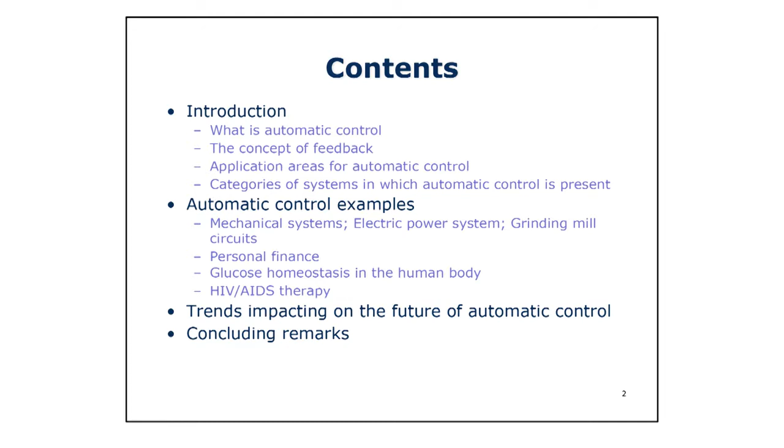So the talk is structured as follows. I'm going to start with an introduction, just to give some indication of what automatic control is about. Then talk about the concept of feedback, and then talk about application areas of automatic control using IFAC as a structure. And then I'll categorize the examples that I'm going to present in a categorization that at least makes sense to me and hopefully to you as well. Then the examples that I'm going to present are some mechanical systems, because they're very visual and people can relate to them quite easily. I'll talk briefly about electric power systems.

And then I'll give an industrial control example as well, which is grinding mill circuits. And then to show that you don't have to have a physical system to apply these concepts, I'm going to talk about personal finance as a non-physical system, but still engineered. And then I'll close off with two biomedical examples: glucose homeostasis in the human body and HIV/AIDS therapy. Then I'll conclude with some trends impacting on the automatic control field and on a lot of other fields as well, and then give some concluding remarks towards the end.

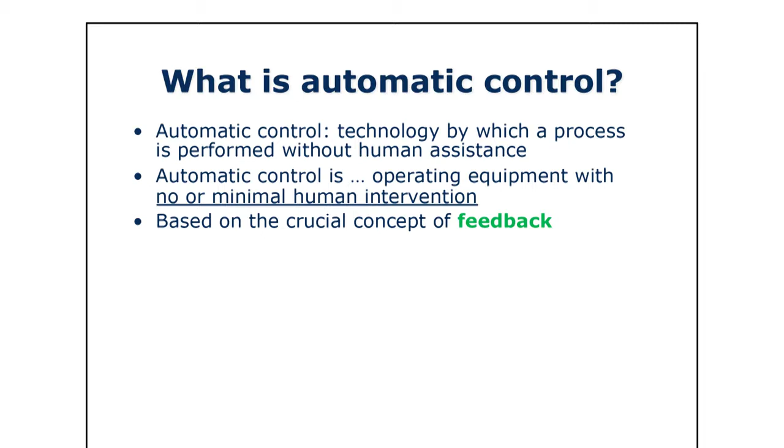Right, so what is the definition of automatic control? This is from Professor Wikipedia. Automatic control is the technology by which a process is performed without human assistance. And then goes on to say that automatic control is operating equipment with no or minimal human intervention. And automatic control is very heavily based on the concept of feedback. So let's look at the concept of feedback.

When people think about feedback, you might think in terms of a survey that's done. Were you satisfied with some service? Were you agnostic to the service, or were you dissatisfied? In automatic control, it is not good enough just to say that you were satisfied or not satisfied. You actually have to do something with the information.

So in automatic control systems, feedback is information obtained from a system used to change its behavior. And that's a crucial concept in feedback. For those of you who've done some automatic control courses at university, feedback control is also known as closed loop control. One has to close the loop from giving your opinion and actually doing something about it.

And the main purpose of feedback is to counteract uncertainty. Uncertainty in the model of the system that you're trying to control, uncertainty in terms of additional signals that might impact on the system. No feedback is required if you're living in a perfect world, but our world is not perfect, so we do need feedback.

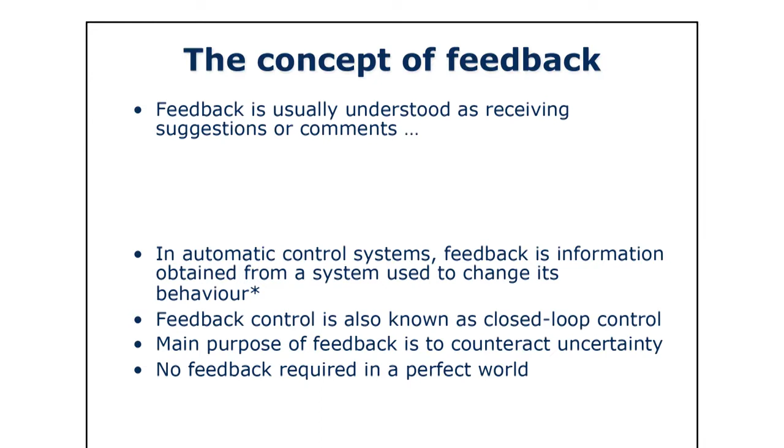Feedback control systems are described in terms of block diagrams typically. So the block diagram consists of a box like this with inputs and outputs, and these boxes could be linked together. So the output of one box could be an input to another box. And these boxes can take actions, and measurements can also be taken from the box.

And these actions and the measurements are called outputs, and they're indicated with an arrow leaving the box. And then a box can also receive information from outside of the system or from other boxes, and those are called inputs.

So to look at the structure of a typical feedback control block diagram, it consists of the following components. You first have a process or a plant that you want to control, and this is not like a pot plant that you put in the kitchen on the windowsill. It will hopefully become clear as I go on what we mean by a plant or a process. The plant has some outputs that you want to control typically, and it might have some other outputs as well that you just want to observe.

There's some sensors which measure what these outputs are, and you feed it back. This is like closing the loop. You feed back these measured plant outputs. You compare that with what you want the outputs to be, so the desired outputs, and the controller will then figure out what controller commands to give.

Sorry, let me just run down there.

The controller will figure out what commands to give to the actuators, and the actuators have to implement the controller commands, so that the plant inputs will drive the process outputs towards the desired output. So the main idea is to make that and this the same. Yeah.

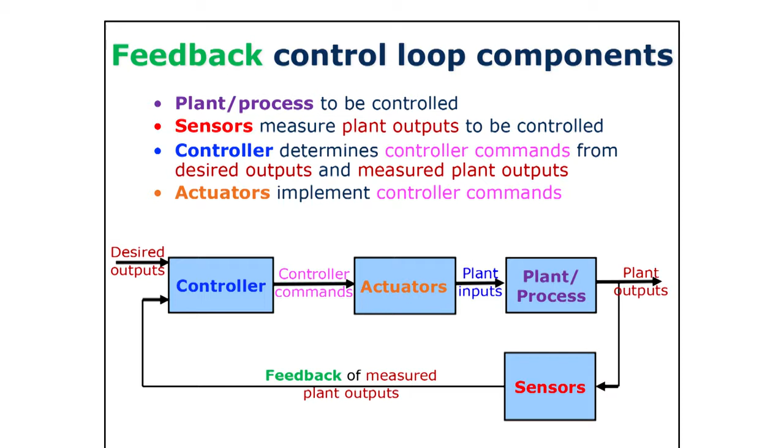Now, to take a human body analogy of this, you can think of the plant as the body. So there's the process. You can think of the sensors as the sensors that humans have, like the eyes and the ears, and you feed back this output. You compare it to the desired output. This is processed in the brain. So the automatic controller is the brain of the system.

And the actuators are like the muscle that has to drive whatever the body wants to do towards the actual output, compare that to a desired output.

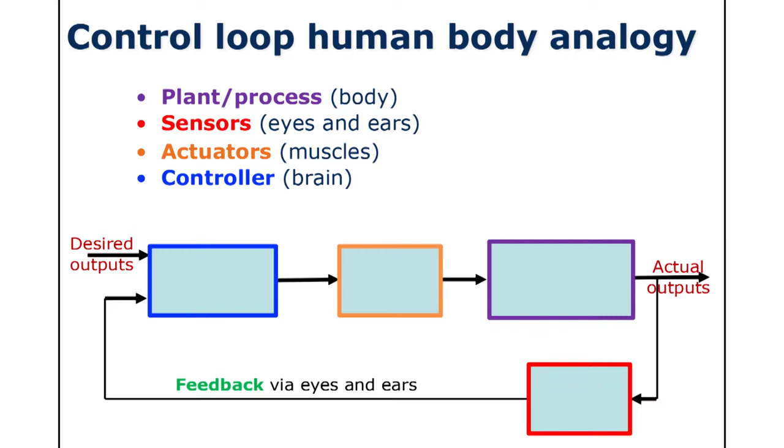This microphone is on the wrong side for me to talk that way.

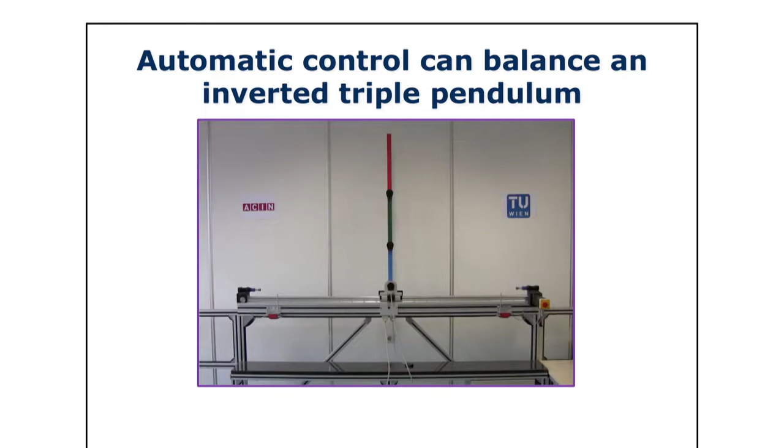So we were talking just before the presentation about the distinction between automation and control. Control is more about the brain of the system, the automatic control, and automation would be what you need to make the control system actually work, like the actuators, the sensors, also the platforms on which you implement, the way the platforms are connected to each other and to the sensors and so on. So I'm going to talk about automatic control systems and essentially this feedback loop.

Now to give you a sense of the breadth of the field, I'm going to take the IFAC technical board and break it down into its different coordinating committees and also show you what the technical committees do under those. So IFAC's technical board has got 9 coordinating committees, 4 of them are theory based, and then there are 5 application orientated coordinating committees with a number of technical committees under them.

So the first one is mechatronics, robotics and components. And the technical committees under this coordinating committee are mechatronic systems, robotics and human machine systems. Then there's a coordinating committee, manufacturing and logistics systems, where we have a number of technical committees: manufacturing plant control, manufacturing modeling, management and control, enterprise integration and networking, and then large-scale complex systems.

Then there's one process and power system. So this is where my research area is based in this coordinating committee. We've got chemical process control, mining, mineral and metal processing, power and energy systems, fault detection, supervision, safety of technical processes. And then there's the coordinating committee on transportation and vehicle systems, which includes automotive control, marine systems, aerospace, transportation

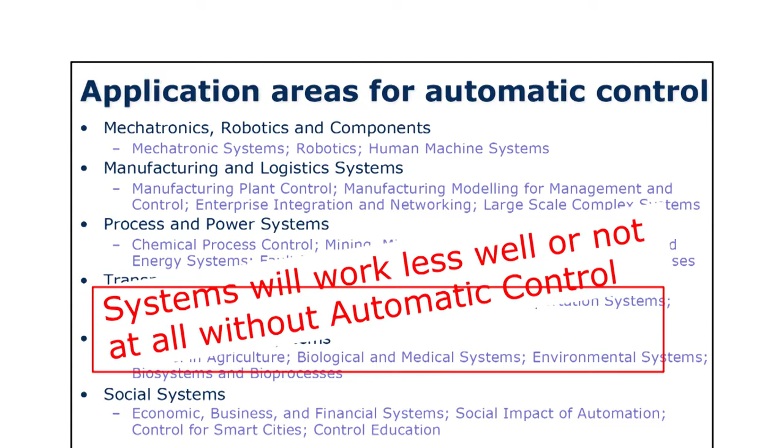systems, intelligent autonomous vehicles. And then there's one on bio and ecological systems, control in agriculture, biological and medical systems, environmental systems and biosystems and bioprocesses. And then the last one is social systems, where we look at economic, business and financial systems. Also the social impact of automation, control of smart cities and control education.

And so the purpose of this slide is to give you an indication of the breadth and also to say that these systems will work less well or not at all if not for automatic control. So that brings me then to the examples that I'd like to present. I'm first going to talk about physical engineered systems and in particular mechanical systems with an inverted pendulum, a quadcopter and an aircraft. Then I'll talk briefly about electric power systems and then grinding mill circuits.

And then I've got one example of non-physical engineered systems where I'm going to talk about personal finance. There are many others that one can also possibly talk about. And then non-engineered physical systems, glucose homeostasis and also HIV/AIDS therapy.

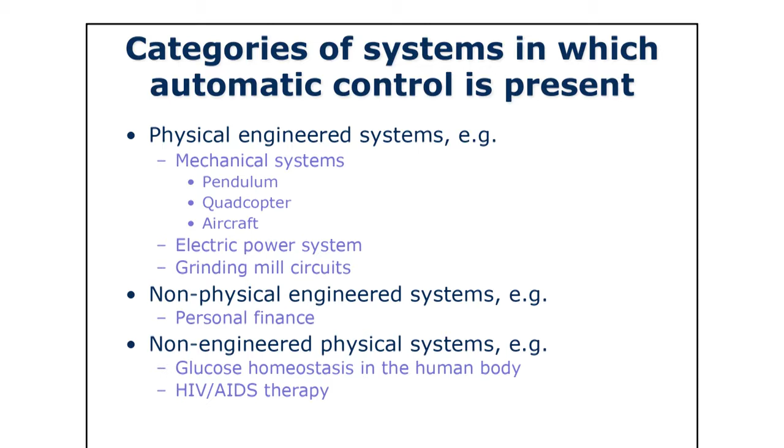So let's get to the mechanical systems. The first one I want to talk about is the fact that automatic control can balance an inverted triple pendulum. So let's have a look at a little video. So this was done in Professor Andreas Kugi's lab at the Technical University of Vienna a few years ago.

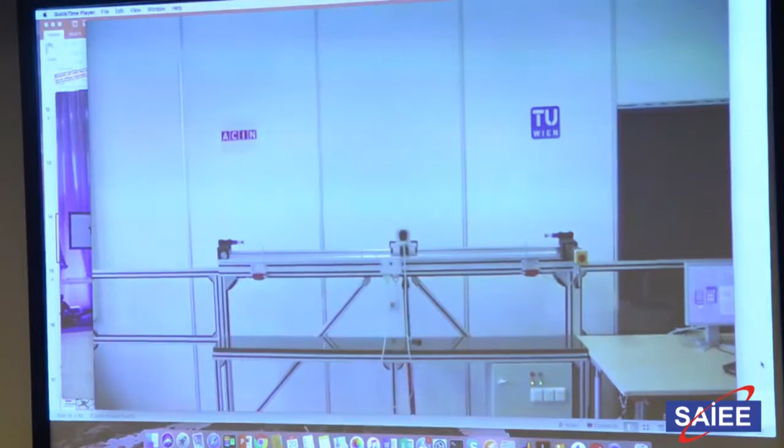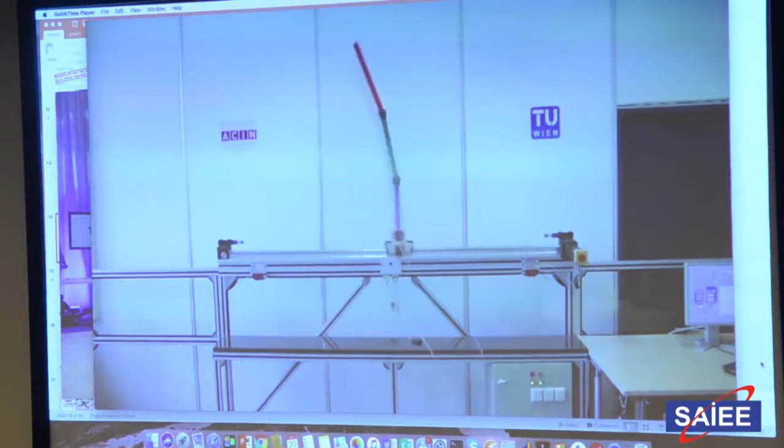So the way the system works is you've got a motor that's connected to a drive belt which moves this cart up and down. And then there are sensors which measure the position of the cart and then also the relative angles of each of these pendulum components. Right.

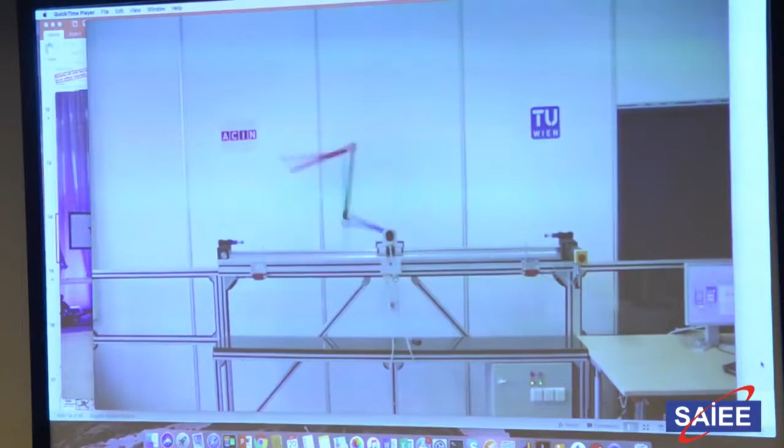Now in our final year we've got finally a project which is the equivalent of 4 undergraduate final year modules. So the plant in this case, so the system that you want to control, is the pendulum system. There are 4 outputs, the cart position and the 3 pendulum angles.

And these encoders are 2048 increments per rotation, so they're very accurate, and they've got a wireless connection to the hardware on which the control system is connected, so there's not much friction, as you could see. And the motor, the input is just a motor connected to the cart by a drive belt. And for control guys in the audience, this is the block diagram.

So there's the system. You've got the outputs, which are fed into an observer. The inputs are also fed into the observer. You estimate a trajectory, compare it to what you want it to be, and then do control based on that. And there's also a feed forward term.

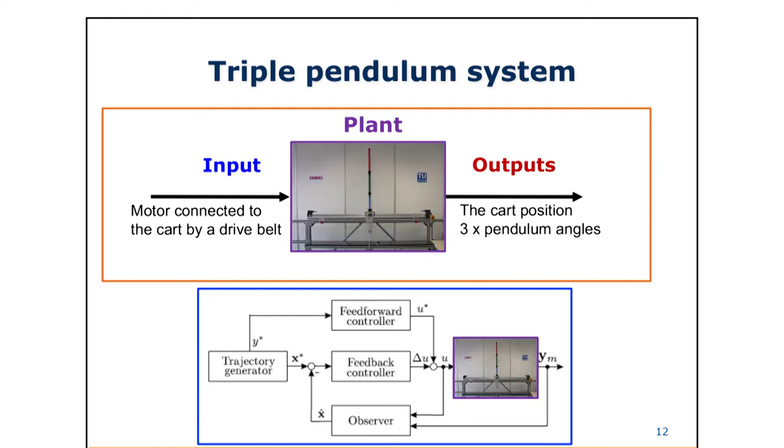So with feedback control, something has to happen first before you can feed it back. But with feed forward control, you can anticipate, if you have a very good model, what's going to happen, and then take some corrective action before the feedback actually gives you the information. So that's the one mechanical system.

The other one I briefly want to show you is this, that automatic control can make athletes out of quadcopters. So just have a look at this video.

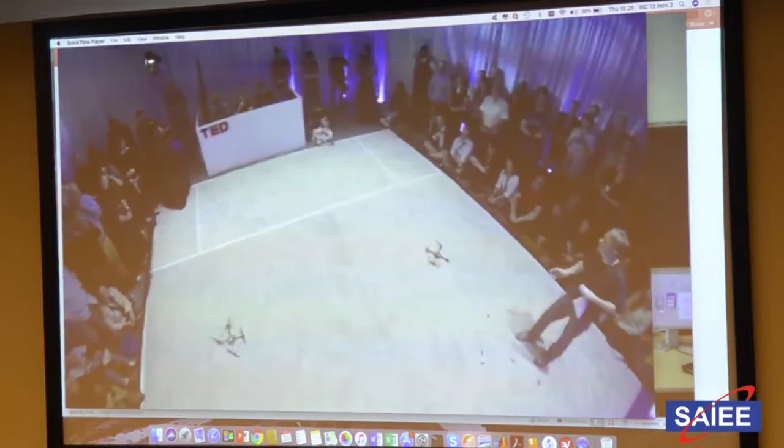And has a racket strapped onto its head with a sweet spot roughly the size of an apple, so not too large. The following calculations are made every 20 milliseconds or 50 times per second. We first figure out where the ball is going. We then next calculate how the quad should hit the ball so that it flies to where it was thrown from. Third, a trajectory is planned that carries the quad from its current state to the impact point with the ball. Fourth, we only execute 20 milliseconds worth of that strategy. 20 milliseconds later, the whole process is repeated until the quad strikes the ball.

Machines can not only perform dynamic maneuvers on their own, they can do it collectively. These three quads are cooperatively carrying a net. They perform an extremely dynamic and collective maneuver to launch the ball back to me. Notice that at full extension, these quads are vertical.

So this is what we have. The plant is the quadcopter. The inputs are the speed of these four motors. And then the outputs are the angular velocity of the vehicle, the position, and also the orientation in terms of

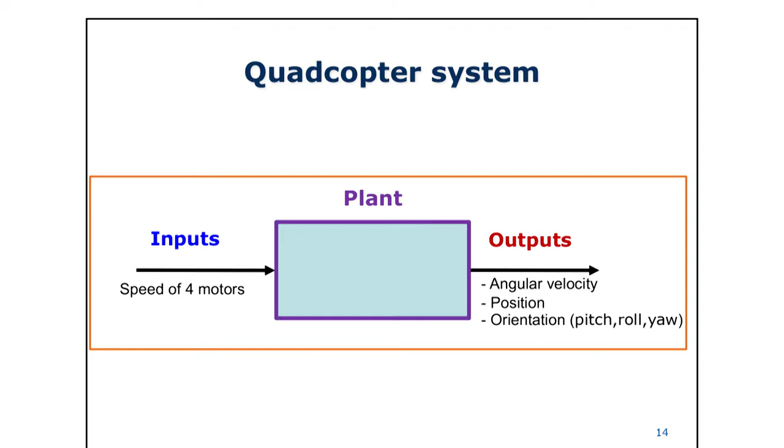pitch, roll, and yaw. There are 8 cameras in the roof of this arena, very high-speed cameras, which tell the quadcopter controller where the quad is and what its orientation is. Okay, so with that, I'd like to move then on to modern aviation.

And hopefully I can convince you that with automatic control we can have modern aircraft, and without we might have something like this. Okay. So I'd like to have a look at the evolution of aviation from 1903, when the Wright brothers flew their first Flyer 1 aircraft. This was the first powered flight and also the first aircraft capable of sustained controlled flight. It's not an airliner, so the heading there might be a bit wrong for this first example, but for the

others it's correct. The next big advance that came in airliner type aircraft was the Boeing 247, where the first autopilot was introduced. Then the next big advance came with the Convair 880 in 1959, where the first so-called handling qualities controller was introduced. And this was necessitated by the fact that this aircraft could fly a lot faster and also a lot higher than the aircraft that came before could fly.

And for a pilot, it's difficult to fly a plane when the dynamics change all the time. So the faster you fly and the higher you fly, the more the dynamics is different from what they're used to. So they introduced a handling qualities controller to make the response to the pilot commands feel the same over the entire flight envelope. So whether you're flying fast or slow or high or low, the response to the stick movements felt similar.

The next big advance in airliner control was in 1982 with the introduction of the Boeing 767, where the first flight management system was introduced. And with this system, you could just give it like GPS waypoints, and the aircraft would fly to those waypoints. This greatly reduced the workload and fatigue of the cockpit crew. So airliners then reduced the number of crew from 3 to 2. So like we have today still, you have a captain and a co-pilot, or a pilot and a co-pilot.

And then the next big advance, shortly after 1982, was the Airbus A320, which was the first fly-by-wire aircraft. And this also made it possible then to introduce safety systems so that the pilot couldn't do something that he shouldn't do unless he overrides all the control loops, of course.

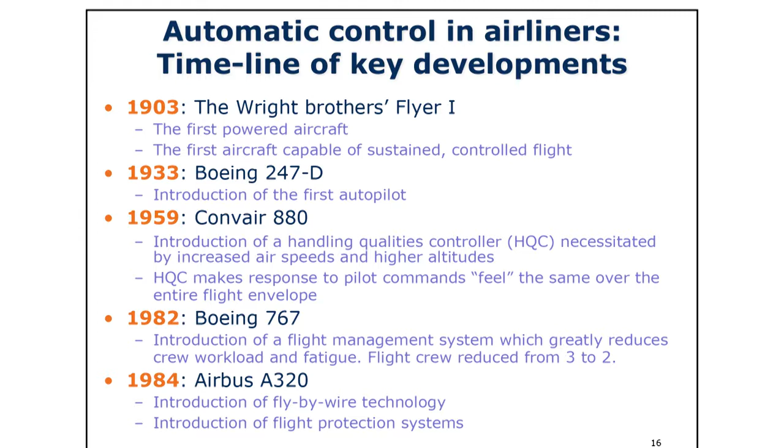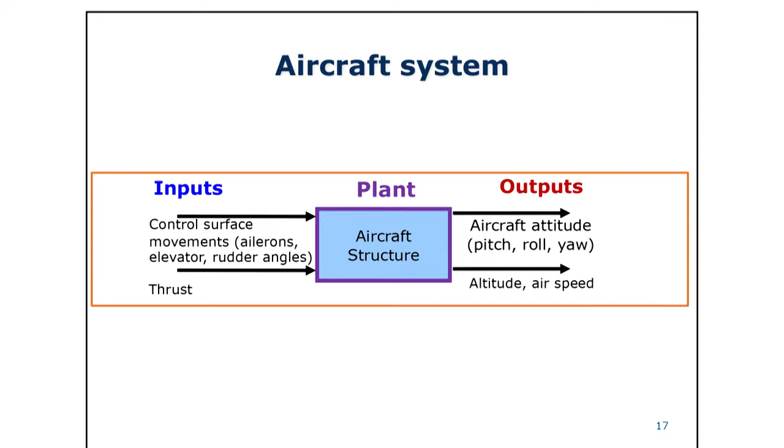So if you look at the Wright brothers Flyer 1 in terms of a feedback block diagram, there's the aircraft structure as the plant, the aircraft state is the output, and the pilot in this case did all the sensing. So you could see where you're going, and you could feel with your vestibular system what the orientation of the vehicle was. And then the pilot got those signals, went into his brain, and then he told his hand to move the stick or warp the wings depending on what he wanted to do.

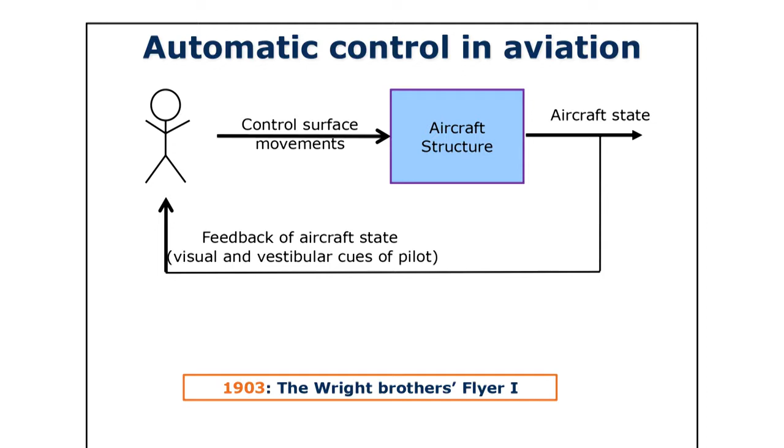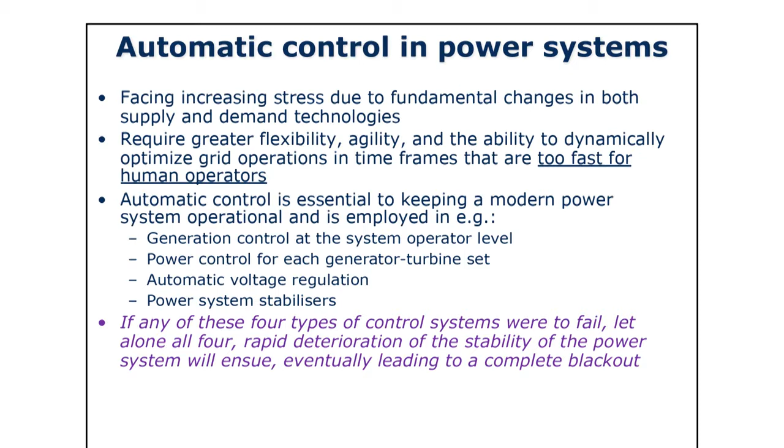One also has power control at each generator turbine set. Then also automatic voltage regulation to make sure that you have the right voltage and reactive power in the system. And then on top of these automatic voltage regulators, there are power system stabilizers to stabilize the power angle. So if any of these 4 types of control systems were to fail, let alone all 4, you'll get a rapid deterioration in the stability of the system, and then eventually a complete blackout, which might take a long time to recover from.

Right, then the next physical engineered example I'd like to talk about is an industrial example, something that I've worked on a lot, and I see Kobus from Mintek here as well. He knows the system very well. Grinding mill circuits are part of a chain of processing in mineral processing and metallurgical plants. So I just want to quickly run through this.

You start with run-of-mine ore. This is the ore that comes from the mine. You might crush it to make it a bit smaller. It goes into this grinding mill, which turns around at a particular speed to try and reduce the size of the ore to a size where the actual minerals that you're interested in, the gold or the platinum, are exposed, so that you can then treat them in a separation circuit, either flotation or leaching, to separate them into a concentrate which contains the valuable minerals, and a tailing, which is the stuff that you would throw away and maybe reprocess in 20 or 30 years' time.